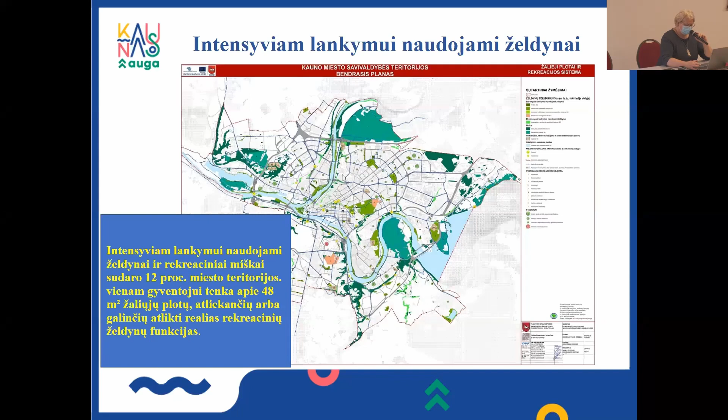Green color depicts that area that we speak about. In Kaunas City, all recreational green areas are very important, and they make up about 12% of all the area, and they're frequently visited by our residents and guests.

I use this slide in order to see why we went to Kaunas Oak Park with infrastructure works, because it is highly visited and it serves as a transit area which connects the city, the upper terrace of the city, with the lower, central part of the city.

Therefore, this is an area which has three very clear statuses of protection. First of all, Natura 2000 area. It requested from us to prepare, together with the Lithuanian Nature Fund, a special nature management plan. And so we implement one of the projects which we called oak trees and beetles.

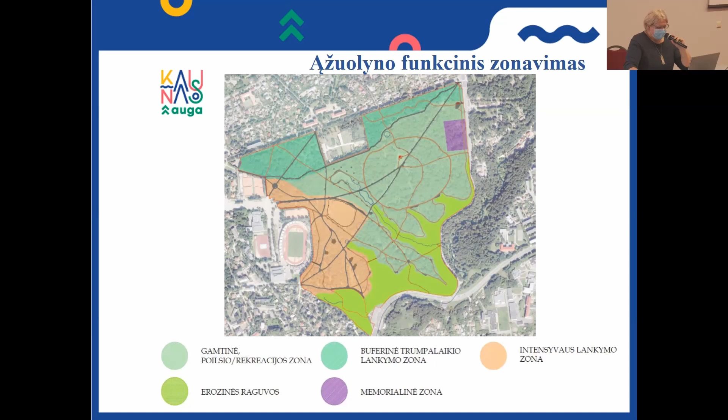Here we have marked the paths such as they have formed themselves historically, and these paths have to manage the flows of people. Not far from the Oak Park, next year there will be a sports infrastructure completed, and we will have even more flows of people in this Oak Park. Therefore, we had to think about the proper arrangement of those paths so that there is not too much free walking, avoiding negative impact on our nature monuments.

And here I included a slide for you to see those paths and the situation with them. We didn't do anything new. We left things that have formed historically. There appears only one cycling track which was proposed by the residents themselves, because the Oak Park is that area which is good for transit as well, because many cross it by bikes, and because of the big number of people and safety, we decided to create a transit track closer to the alley of Vydūnas.

And you see bigger and smaller paths, all in all 8 kilometers in length, so they are in former places where people used to walk previously.

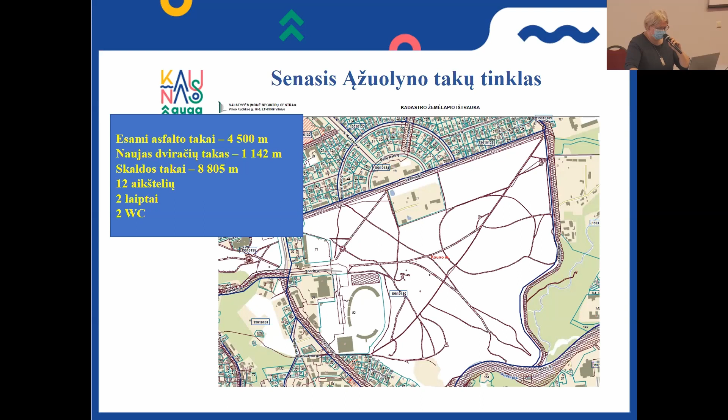So I think that this is a wise planning decision, and the paths have to be installed in those areas where people really walk. 12 sites, the rest sites will appear, which will be constructed in the form of islands and some playing grounds for children and benches. There also appear 2 stairs. And in one or another edge of the park, we need to have the toilets.

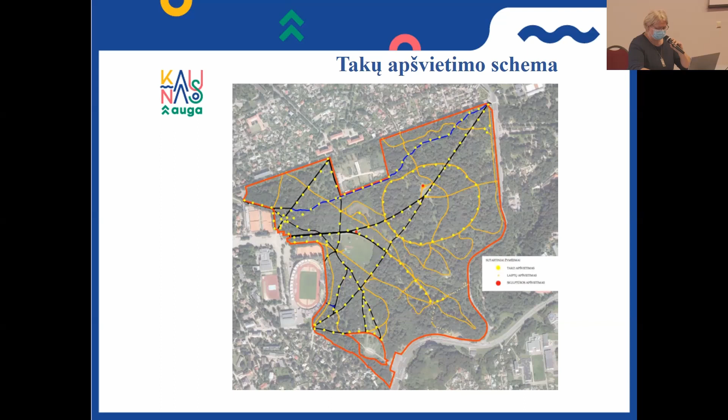The main tracks, the main paths will be illuminated, of course, due to safety concerns, because they serve as transit tracks, and we have darkness quite early in our country, so illumination was needed. It will be regulated.

What were the main environmental measures applied in order to make this project more friendly for the environment? First of all, we took a decision that while designing, the tracks could be changed easily while implementing the project. Because we noticed when contractors come to construct the tracks, they get too close to trees, or they make some mistakes. So we decided to take care of that and include contractors so that the tracks are distant from the trunks of the trees for about 5 meters.

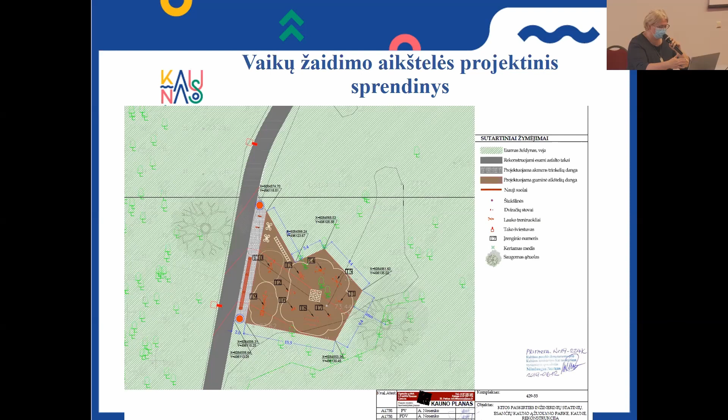And most, or the biggest part, of the covers is done using natural materials, and people are very glad and happy about that. And of course, illumination will be installed. Here you see several examples of removal of the playing grounds from the bigger trees.

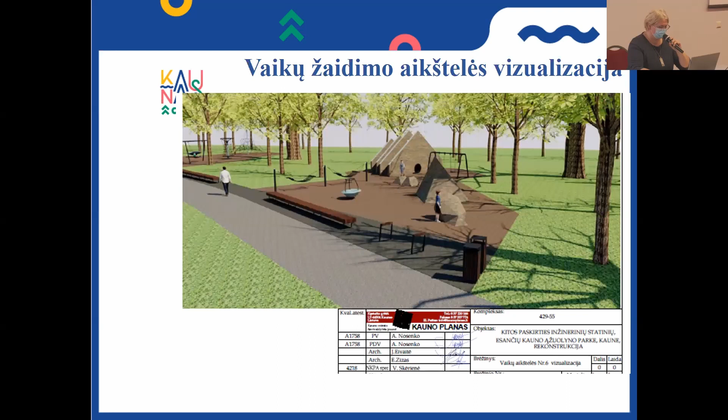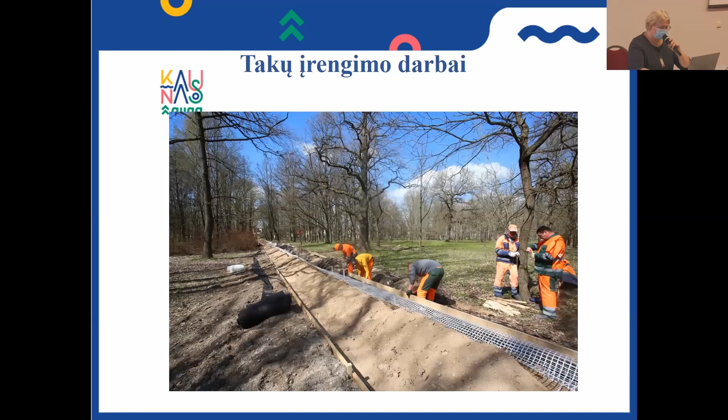Here's the same view of how the playing ground will look like, avoiding children getting into the water, and also the stairs and some other first works. So if you visit Kaunas Oak Park, you will see what has been done.

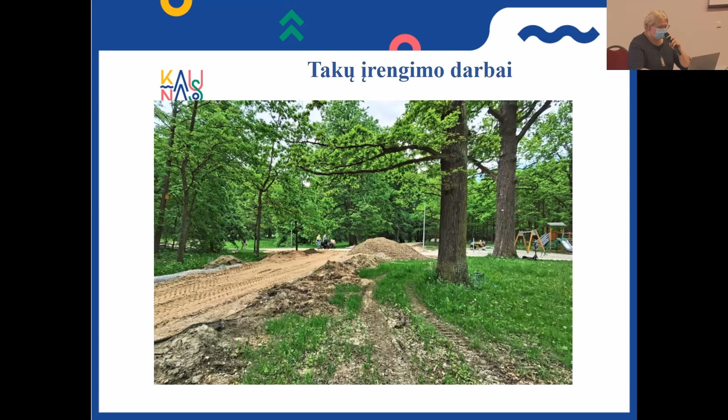Not everything was successful. There were some damages incurred because substances had to be stored not far from the trees, and machines had to be used, and there was some damage caused.

In springtime, it is quite humid, and humidity also had its consequences. So we had to talk a lot with contractors. We clarified the situations and corrected them in order to take better decisions.

Those asphalted tracks, which were old tracks, are updated and renewed, the same ones, without getting deep into the soil - just renovating the asphalt, polishing it, and restoring the surface. We try not to go deep in order to avoid damage to the roots.

This is how the works look like, little by little - paths, roads, tracks, and problems.

We had 3 publicizing events. It took us 1.5 years, but maybe it's good because truth is born in disputes. The first decision was too broad about everything, and now we received a very friendly decision, friendly to nature. We are happy and satisfied.

Also, correction of the forest management project lasted quite long because we had to coordinate the questions with coordinating institutions. And you remember I spoke about free interpretation of the legal basis, but that's not a problem. Colleagues were not able to say what is really needed, how to integrate the forest management project.